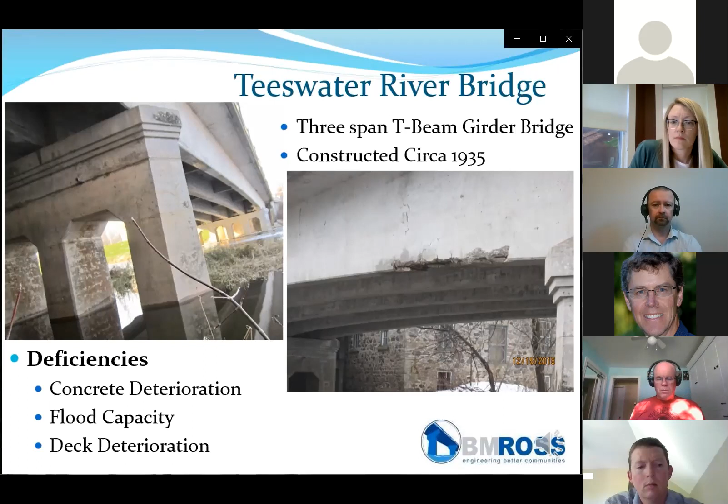The bridge has some special features. At the south end, the abutment is tied into the buildings located adjacent to the bridge, and this will need to be carefully considered during the removal and construction of the new crossing. The bridge is also integral to the flood control dike system at the north end. Solid panels at the north end of the railings are part of the dike system.

These photos illustrate some of the concerns with the current structure. The photo on the left shows deterioration of the concrete on the underside of the sidewalk. It's still safe to use for now, but we need to keep an eye on it with annual inspections, and eventually the sidewalk would need to be closed when the deterioration gets too bad. At right, the photo shows the bridge during a recent flooding event.

You can see how high the water level is on the bridge. Because it's at the junction of the 2 rivers, the water level here is completely dependent on the Saugeen River, and has very little to do with the flow of the Teeswater River under the bridge. We will work closely with the Saugeen Valley Conservation Authority when we determine what span and elevation will be used in the new design.

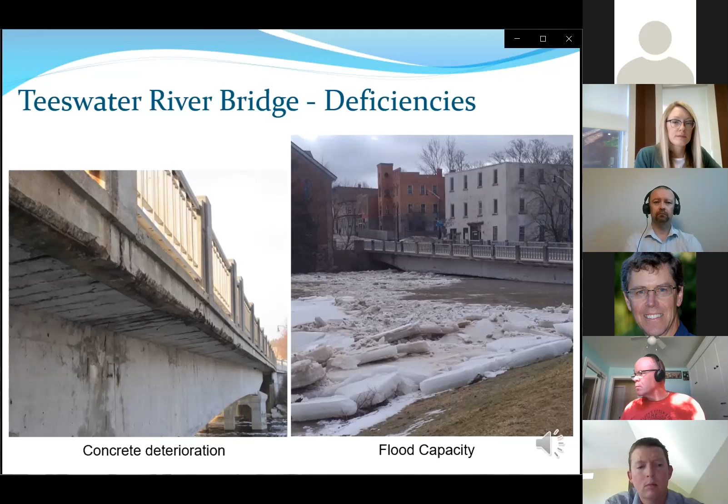The Municipal Class Environmental Assessment process is a planning process used by municipalities when undertaking projects such as road and bridge construction, as well as sewage and water projects.

The process involves a series of steps that are followed in order to evaluate and plan the project appropriately. An evaluation of the environment is conducted to identify specific factors related to the project, including the natural, social, cultural, economic, and built environments.

Input from residents, stakeholders, and agencies are used to assist with identifying the potential impacts, as well as the completion of specialized studies. Potential impacts associated with a project are then identified, as well as appropriate mitigation measures to address those impacts.

This slide illustrates the steps or phases in the Class EA process. The first is the identification of the problem. Why are you doing the project? What is the problem you're trying to resolve?

Then you evaluate the alternatives. Once you identify a problem, a series of alternatives are identified to address that problem. These alternatives are then systematically evaluated to determine what impacts might result from their implementation.

For a more complex project, such as the replacement of the Teeswater River Bridge, detailed design concepts are reviewed of the proposed bridge design. This could include the style of the bridge, the number and width of traffic lanes and sidewalks, the appearance of railings and barriers, as well as other design features.

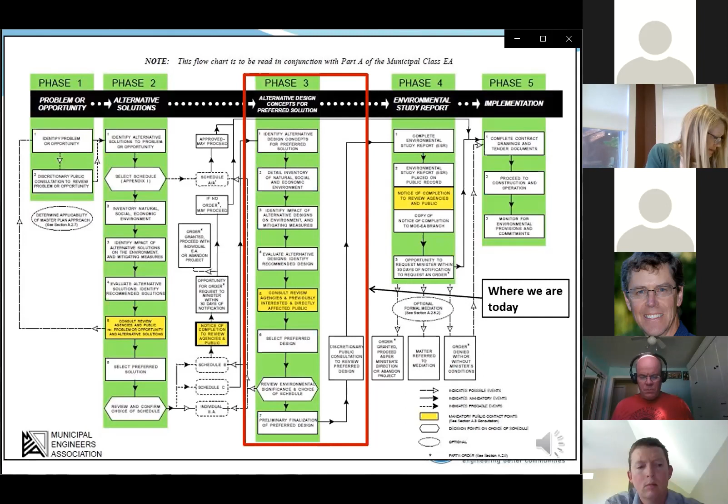The detailed design alternatives that are being recommended in this presentation will also need to be confirmed at County Council before we finalize the EA and move forward with implementation.

This slide reviews some of the timelines associated with the Class EA. The project was initiated in October of 2019 with a notice of study commencement being published in the Owen Sound Sun-Times and the Paisley Advocate. Letters were also sent to various review agencies, adjacent property owners in the community of Paisley, and Aboriginal communities.

Following the initial consultation, in May of 2020, there was a website launched with signs posted at the bridge. This allowed us to capture input from people that don't necessarily live in Paisley, but who use the bridge on a daily basis. That summer, there were 2 specialized studies completed by consultants.

We had a heritage evaluation of the bridge completed by a local consulting firm, and we also had a species at risk assessment completed to determine if there was any special habitat located adjacent to the bridge that would need to be addressed during construction.

That September, we had the first public meeting, which was a virtual public meeting, similar to the format for this meeting. That winter, which is just the past winter, we had the preliminary bridge design work completed and a hydrology assessment was completed for the project.

And now we're in May of 2021 with the second public meeting being held on May 18th.

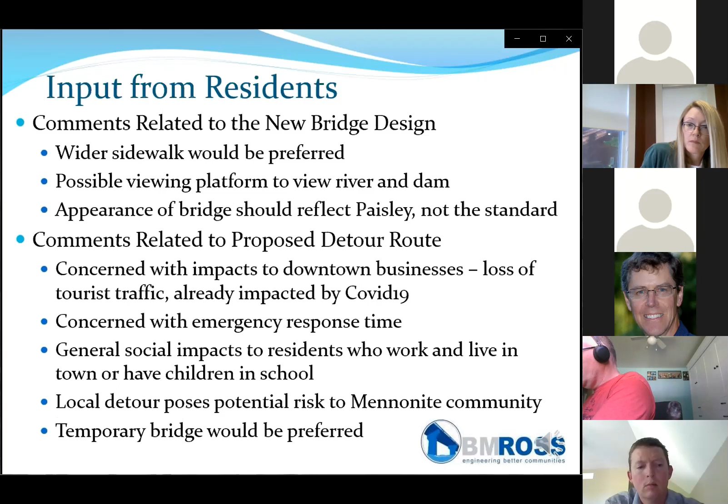As I noted previously, as part of the Class Environmental Assessment, we seek input from various review agencies. For this one, we received input from the Ministry of the Environment, Conservation, and Parks. They confirmed that various consultation efforts needed to be completed as part of the environmental assessment, including consultation with First Nations communities, Métis communities, and various review agencies. We were also advised that the Class EA report completed at the conclusion would need to consider climate change and source water protection as part of our review of impacts.

We also got input from the Saugeen Valley Conservation Authority. They advised us that they have regulations in the area that will be impacted by the project, and that a permit will be required for the new bridge, as well as any temporary bridges or other works that occur adjacent to the river. They also advised us there are concerns related to flooding, and that they own the flood control dike located along the banks of the river, and they will have significant input on any changes to those features resulting from the new bridge construction.

The Ministry of Heritage, Sport, Tourism, and Culture Industries also advised that they have concerns related to archaeological features and built and cultural heritage, and that we will have to submit information to them as part of the project.

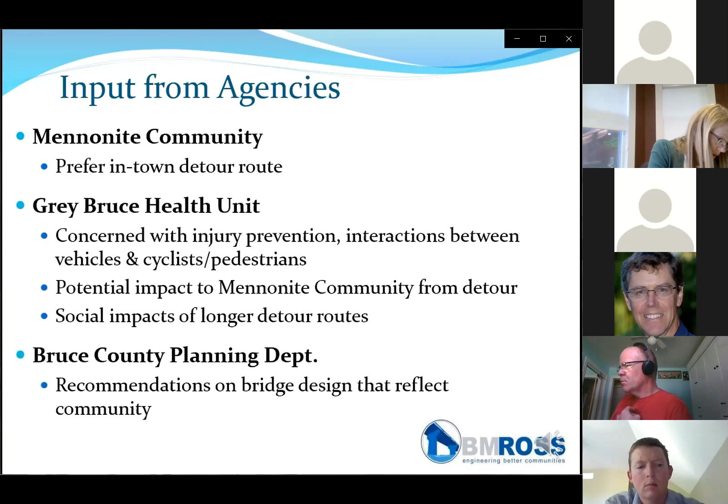The Bruce County Planning Department indicated that the design of the new bridge should reflect the unique heritage and community of Paisley.

I'll talk now a little bit about the hydrology investigation we've done for the site. Hydrology is the study of flow through the bridges and in the area of the bridges. Last time, back in September, we talked a bit about the history of flooding in the area, and we've reviewed the historic flooding events, the 1977 flood, and the flood control study in 1979, which eventually led to the construction of the dikes.

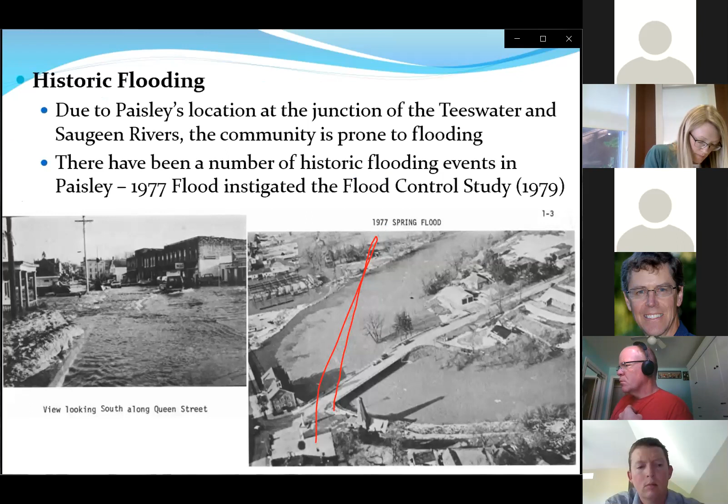Previous flood control studies have been done, and we built upon that. We have to make sure the new bridge, just like the existing bridge, ties into the dike system. You can see how the existing bridge railings have been modified, with a shorter top panel so they could fill in solid concrete walls to prevent a flood event from flowing over the sidewalk and down Queen Street towards the north.

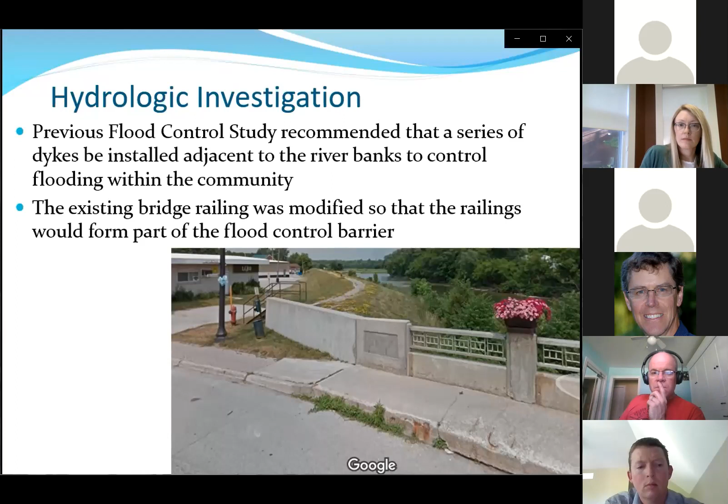The hydrology investigation we did was built upon a model already existing from the 1979 study, which was last updated by Saugeen Conservation in 1990. We then did additional field survey, topographic survey above and below the water, to add to the existing model and show the existing site conditions with that extra information. We used software called HEC-RAS, and we modeled the situation as it exists and with the proposed bridge designs, including the temporary detour bridge.

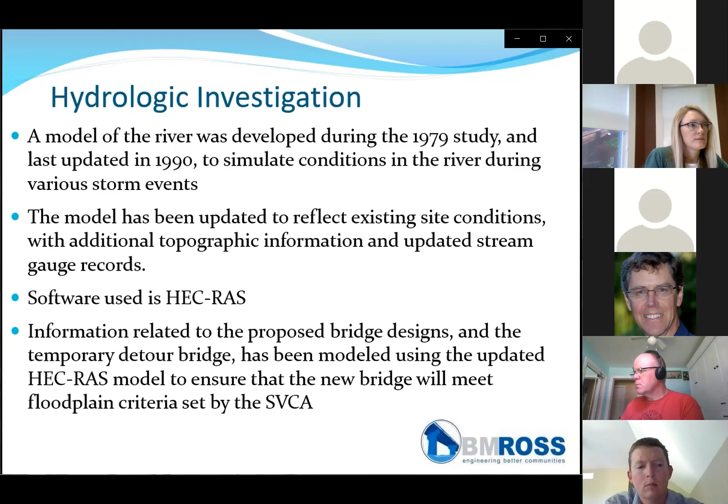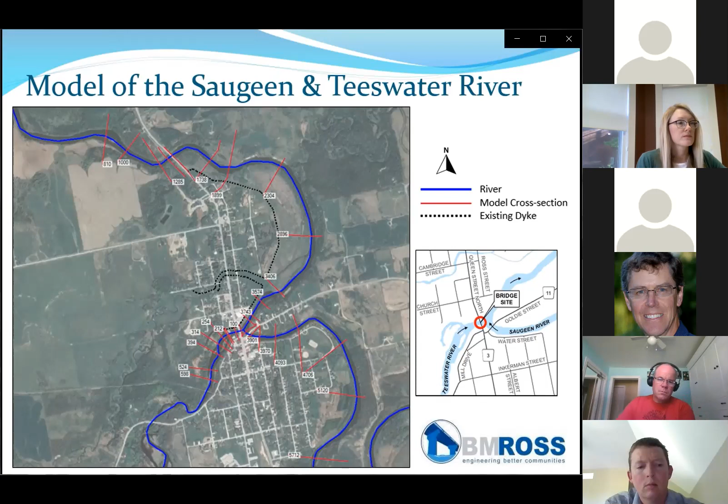So this map shows some of the areas that we modeled. The little red lines that you see are cross sections that we entered into the model, and we especially looked around the location of the existing bridge, and we did a cross section where the temporary bridge is going to be located. Then the model was run using different scenarios with proposed bridges in those locations.

An interesting thing at this site is that the south span of the existing bridge is shadowed by the mill building upstream of it. So that whole span seemed to only carry the flow that was coming through the mill race, and we have to respect the mill race. The future owners and the current owner may want to use that at some time. So we wondered if a two-span bridge would actually meet the hydraulic requirements.

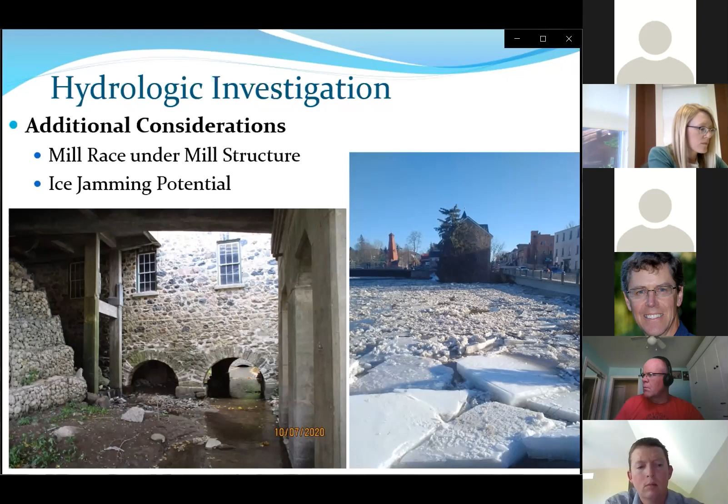So when we ran the models, putting in the proposed permanent bridge into the model, we found that the water levels weren't increased by a reduced span in the bridge. That's because the highest flood levels are actually created by the water in the Saugeen River and not the Teeswater. So it doesn't matter how large a bridge we put in here, it won't affect the water level.

In fact, the proposed structure will improve the flood flow because we were able to use a thinner deck. In other words, the bottom of the beams of the new bridge are going to be higher than the bottom of the beams of the old bridge.

The historic mill race is going to be maintained, and we could handle that flow with a culvert in behind the abutment of a new bridge.

Rock protection, erosion protection, has to be provided to prevent scour due to higher flow velocities, which actually happen at lower flow levels. The bridge railings are going to have to be solid panels in some areas, or up to a certain level, in order to give us that flood protection so that the bridge isn't a weak point in the dike system.

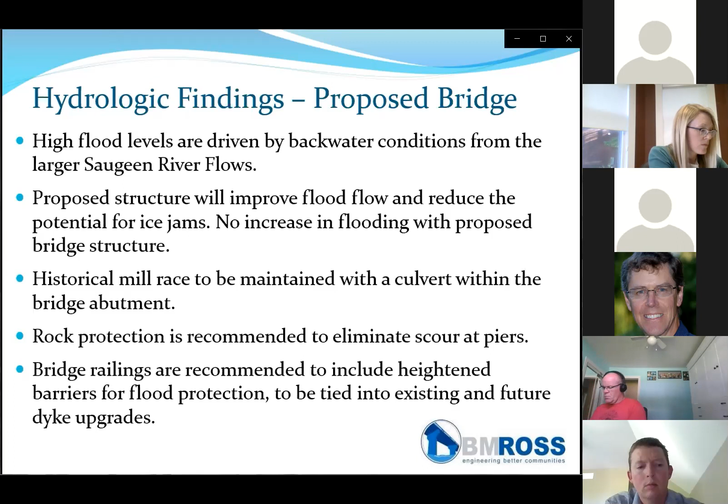The detour bridge was also modeled. We had to figure out what is a safe span and a safe elevation for the bridge. In this case, we're only designing to the 1 in 50 year flow, because the detour bridge is only going to be in place for about 1 year, the probability of it getting the 1 in 100 year flow is not practical. So we design it for a lower standard just because of the probability.

So the low steel elevation has been designed to clear the 1 in 50 year flow. We won't have to reduce or puncture the dike elevation. The road level of the temporary road will be about the same level as the dike.

There will be some temporary fill put into the floodplain at the south end, just to support the abutments of the temporary bridge, but that will be removed in the end, and the amount of flood storage that will take out is negligible. Again, we're going to need some rock protection to make sure that the abutments of the bridge are not scoured out.

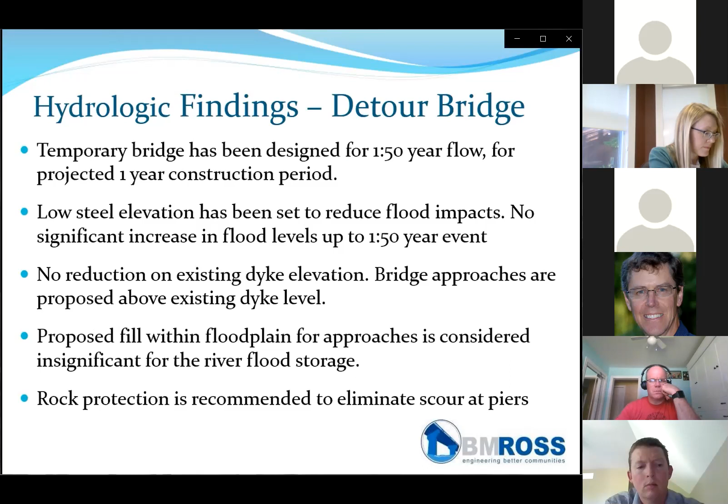So the next few slides will review the Class EA detour alternatives that were considered. These were reviewed briefly in the last public meeting, but we've done additional investigations since then that go into a bit more detail. There were 3 detour alternatives identified as part of this project.

Detour alternative 1 was a detour using strictly county roads, which were all paved, but that route was quite long. Alternatives 2A and 2B were detours using local roads. We had an east and a west option. The east option was in Arran-Elderslie, a little bit shorter, and the west option was in both Brockton and Kincardine, heading to the west out of town.

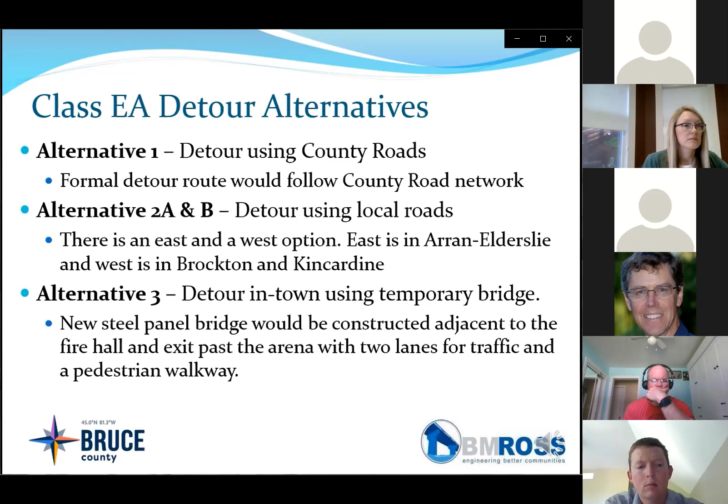Alternative 3 was the in-town detour using a temporary bridge, which would be constructed just for this project and then dismantled following completion of the new bridge. It would be a new steel panel bridge constructed adjacent to the fire hall, just downstream of the existing bridge, and would exit past the arena, with 2 lanes for traffic and a pedestrian walkway along one side.

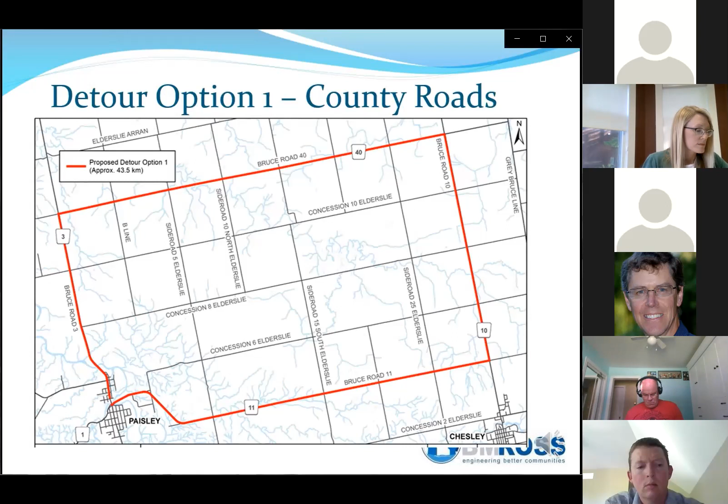Initially, we had identified this route as a truck bypass, and it probably would be used primarily by trucks, just because due to the length it would be unlikely that a lot of local residents would use this route. And it would result in impacts to local businesses by having local traffic detoured away from the community.

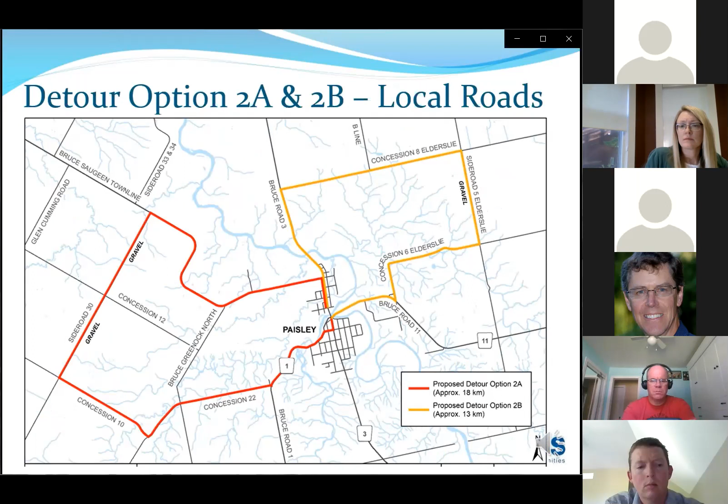In order to make this a viable route, we would have to improve the road condition to make it safe enough and practical for trucks. Something raised at our last meeting, a lot of people raised concern about Side Road 5 because it went past a school. So we considered we would have to pave the road because of the volume of traffic going up County Road 3. And we put in an extra paved lane dedicated for bicycles and horse-drawn vehicles.

So that adds a fair bit of cost. Many of the other roads, even the ones that are paved, the pavement wasn't sufficient for the truck traffic volume that was going to be happening, so they would have to be improved with new pavement. We also looked at the intersections. Because a large number of trucks would be turning here, we looked at the truck turning radii, and in some cases we were going to have to widen the road at these intersections.

All of these costs added up, and we got close to a budget of $2 million for improving this detour.

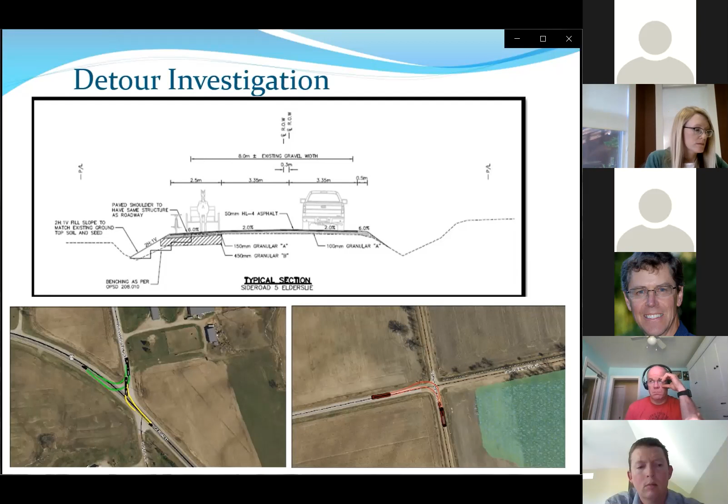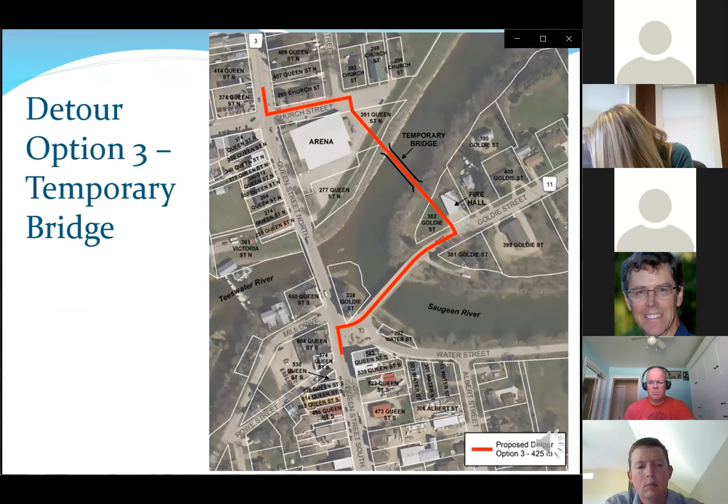It has been used successfully in some other urban settings. There will be some truck noise and exhaust fumes at the intersections with Church Street and Goldie Street. Pedestrians may feel some uncomfortable vibrations when they're on the sidewalk and a truck passes over the bridge. But again, this is considered tolerable for the 1-year construction period.

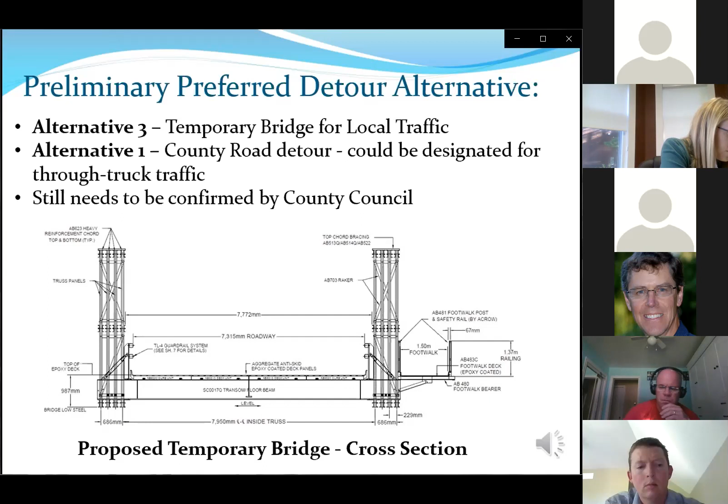This design and concept still needs to be confirmed by County Council as an acceptable option for them. The total cost of the in-town detour is closer to $2.5 million.

So the next few slides talk about the detailed design alternatives associated with the design of the new bridge. We're going to provide several railing options that are being considered, options that provide a sympathetic image of the previous bridge and also address concerns residents presented about having better viewing opportunities from the new bridge to view the surrounding area.

We're also going to look at some sidewalk options. A standard sidewalk width for a new bridge is typically about 1.5 meters or 5 feet. But we're proposing wider sidewalks on each side at 1.8 meters, 6 feet, and also wider viewing areas at the center of each bridge so residents and tourists can view the river both up and downstream of the bridge.

We're also going to go through some different design details associated with the new bridge, including a 2-span option as well as a 3-span option.

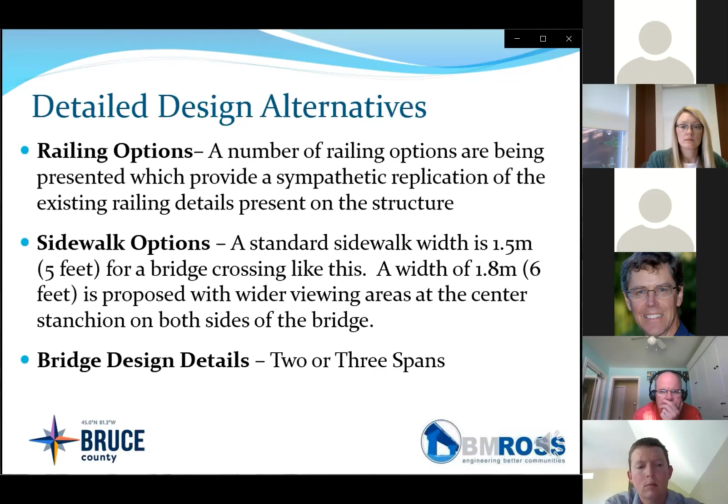So first, let's take a look at the existing railings. This is a steel panel railing design, and it was popular from the 1930s to the 1960s. It provided for fairly good visibility when you were looking at right angles to the railing. The pickets, though, when you're looking at an acute angle, they don't allow very much visibility at that sharp an angle. Here you can see how the panels have been modified for the flood control, where there are now concrete parapets in the lower section.

So there are a number of issues with this type of railing. It is definitely too weak structurally for the modern bridge code. We have to design for impact loads from vehicles that might accidentally jump the curb and hit the railing. We need to make sure that the vehicles are contained within the bridge.

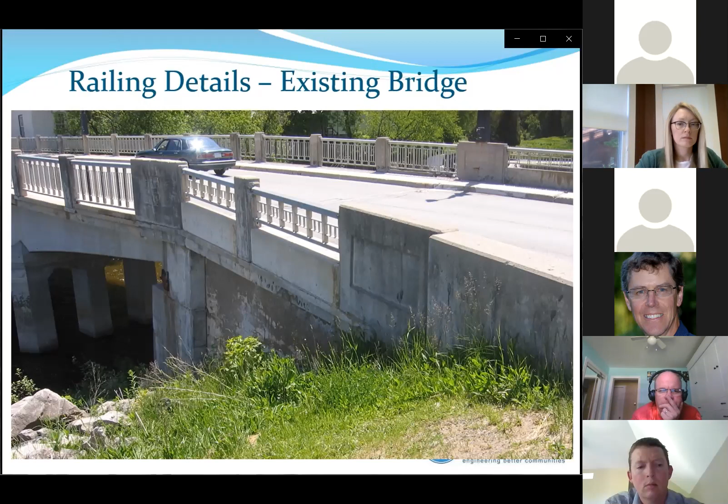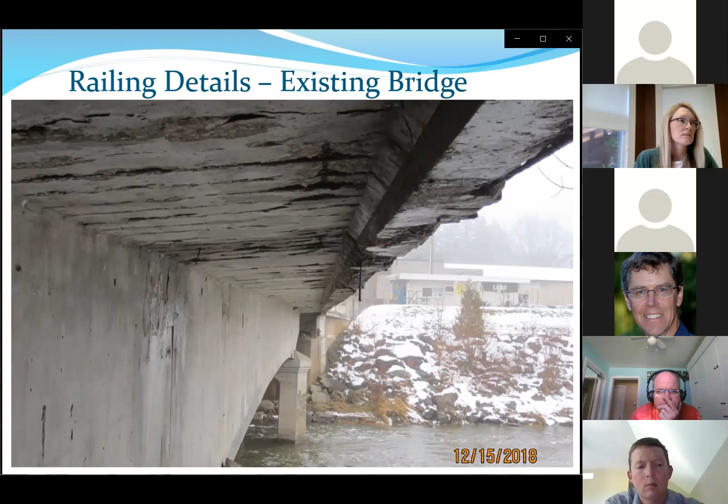It also allows for salty water or slush in the wintertime to dribble over the edges and cause some damage underneath. And that's shown on the underside here. A lot of people won't see this, but there's a lot of corrosion happening with the reinforcing steel on the underside of the sidewalk. It's safe for now, but it has a limited life. And that salty water will continue down and get at the tender underbelly of the bridge, the structural girders or beams, and it's attacking the reinforcing steel in those structures as well. So for our new bridge, we don't want that to happen.

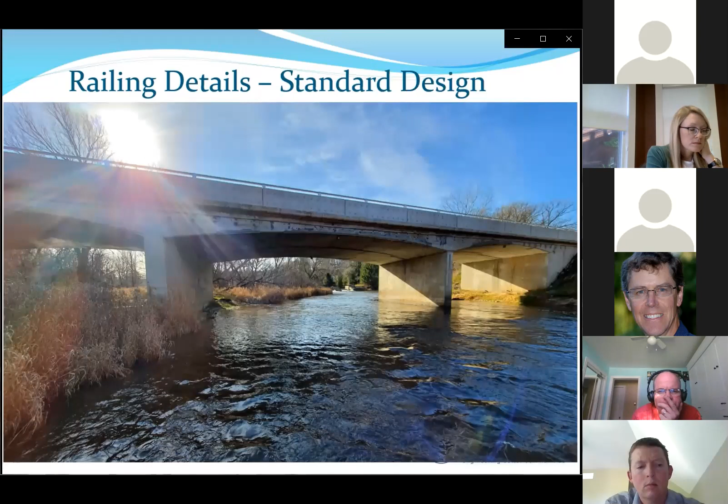So last year, the Starks Bridge got a brand new railing. This is called the standard parapet wall. It's 825 millimeters high and it has a handrail on it. From the inside, this is what it looks like. This is typically used on highway bridges, but this would meet the requirements for strength and for opening size, all the dimension criteria to meet bridge code requirements. But we certainly got the message that a typical railing is not going to do for the Paisley downtown. So we won't be using this as an option.

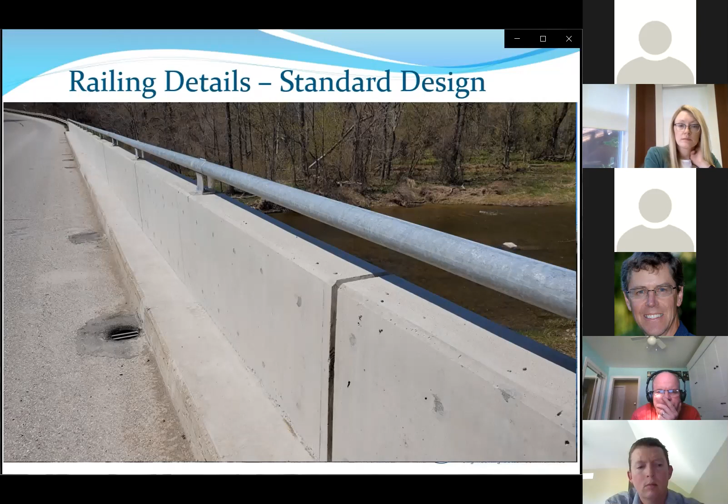In Chesley, they did use the standard parapet wall. We were under the gun for design time because of the emergency replacement of this bridge. In this case, we actually put in just these fairly simple dentils in the formwork to give it an appearance that was sympathetic to the railing that was there before, but it's still the standard parapet wall. And it's got some embellishments at the light posts. You can see a build out that breaks up the plain view of the wall a little bit. You know, we don't want to start a railing war between Chesley and Paisley, but this option would work in Paisley as well.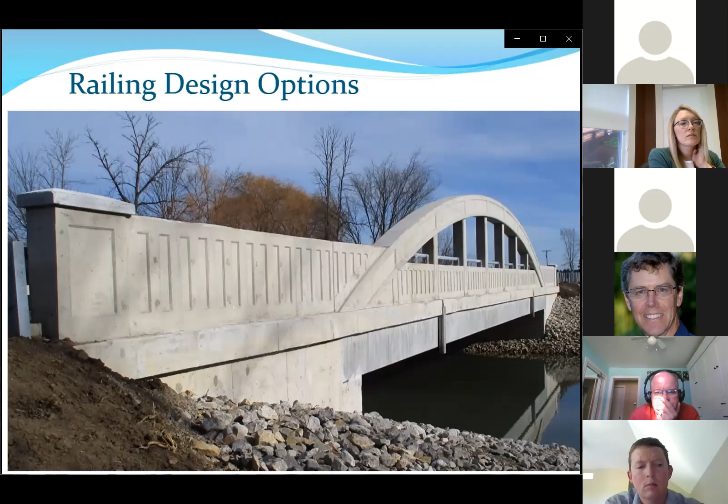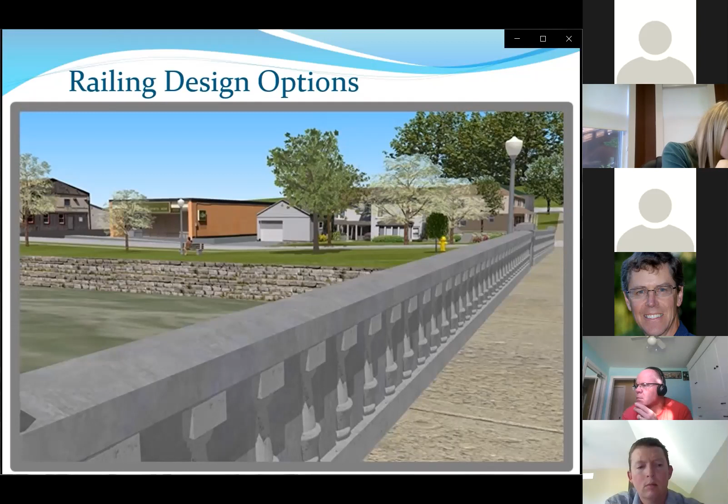In St. Mary's, we designed a custom railing. In this case, it was to look like a historic bridge that had been there one generation before, based on old photographs that we had seen. And we were able to provide a concept sketch like this, and then it was constructed with custom-built formwork, which added to the cost, but this was the preferred alternative for St. Mary's.

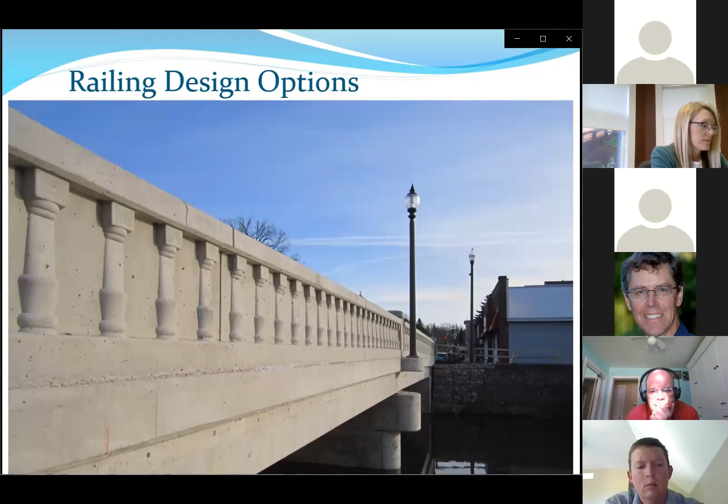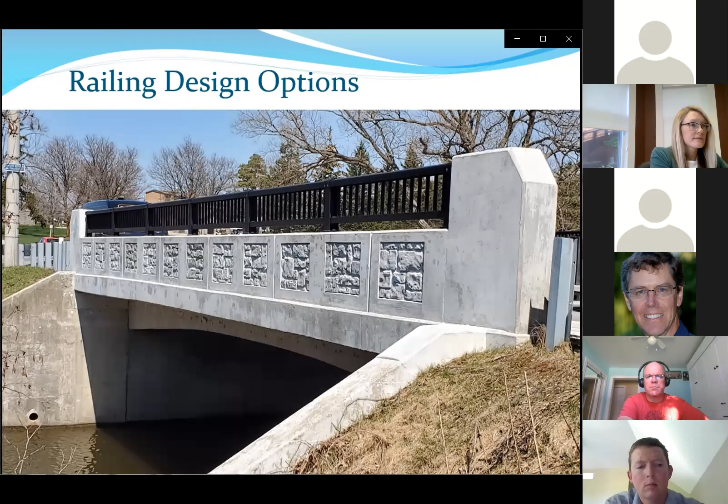BM Ross can't take any credit for this bridge. We saw this example in Stratford, Ontario, and we were interested in it, and this is giving some inspiration to the design that we came up with for the preferred alternative that's preliminary and being presented. So this has a standard parapet wall, and viewed from the inside, you can see the stone embossment that was put into the formwork. Now this is higher than it needs to be, and we're proposing a concrete wall that's lower than this one by a few inches, and decorative metal railing on top of that to allow viewing over top of the parapet wall.

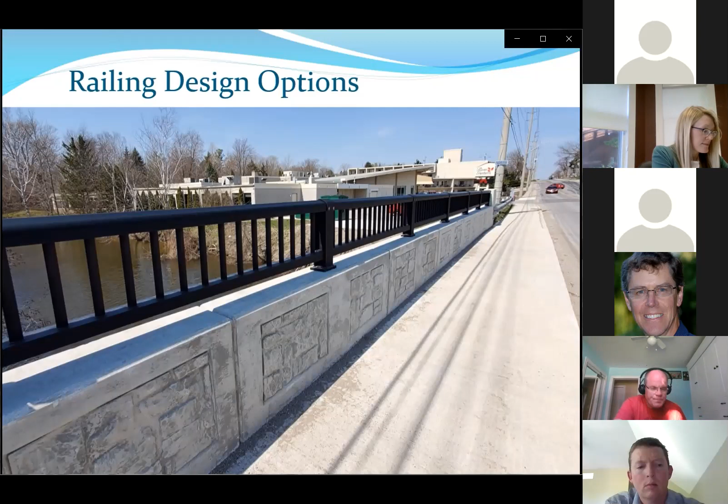Another option that people are interested in, they wonder, is it possible to have a barrier between the traffic and the sidewalk? And yes, it is. This is one example in Exeter. Here you can see the standard parapet wall with some stone imprints in the formwork, which is attractive. And then there's an open railing between the sidewalk and the edge of the bridge.

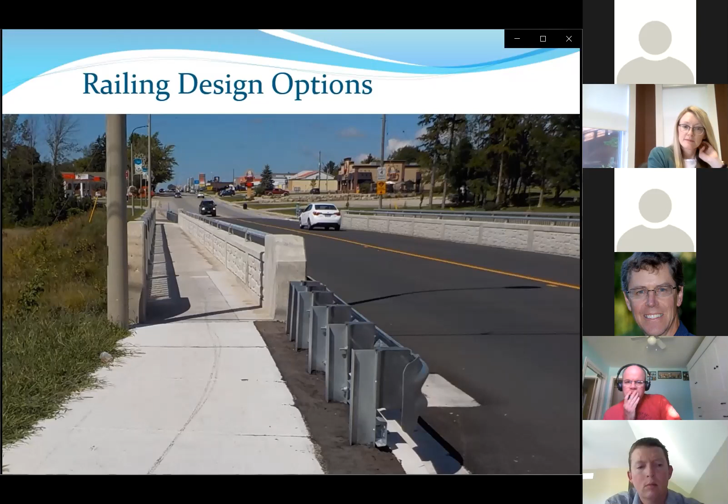There are some problems with this, though. If you take a look, there's still no barrier to prevent the salty slush, the salt water, from dribbling over the edge of the bridge and attacking the underside, because you will be putting salt on the sidewalk. Also, look at the end of the concrete parapet wall. It's closer to traffic now, and there is a danger, or perceived danger at least, that vehicles could possibly hit head on to the end of that concrete wall.

So we're required to put energy absorption material. In this case, there's guide rail there, and it's hard to imagine how you would have guide rail to protect the end of the parapet wall and how that would tie into the rest of the sidewalk in downtown Paisley.

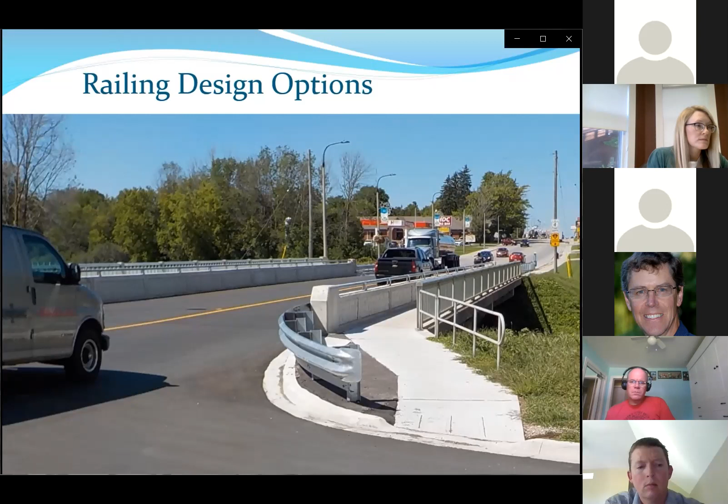Another disadvantage of this system is an optical illusion. With that solid wall right up against the travel lane, drivers of vehicles would swear that we've narrowed the road. There's an instinct to stay away from that wall and be closer to the center of the road, and that gives the impression that the road is narrower than what it really is.

Taking a look at the existing bridge deck, 8.53 meters from curb to curb, we're proposing almost the same width. It's only going to be about 3 inches wider from curb to curb. The difference is in the sidewalk. Where it was a 5-foot wide sidewalk, we're proposing a 6-foot wide sidewalk. A lot of municipalities prefer the wider sidewalk for their snow clearing equipment. It's also making it easier for mobility scooters, things like that.

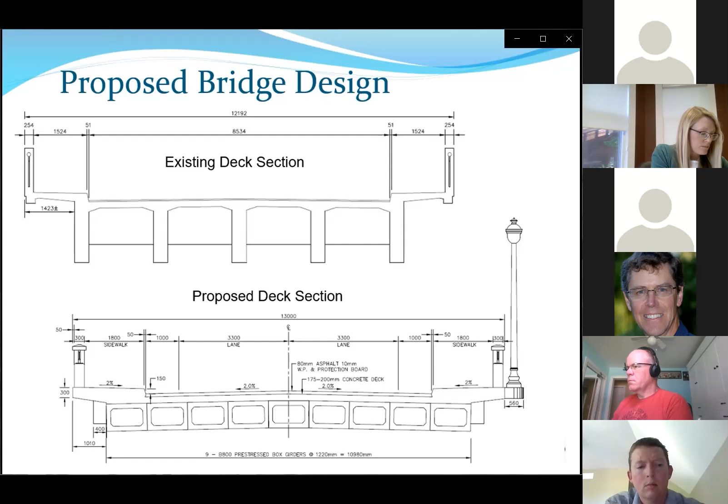Taking a look at the structure underneath the deck, you'll see that it's a thinner deck section, or thinner beams. These would be pre-stressed concrete girders, box girders, and they're a lot shallower than the existing T-beam stems that are there now. That should give us more clearance for the water level, but it's still not going to get us totally above those flood levels. At some times, you will still see the bottom of the girders submerged underwater.

We took a look at a few options. The top option is just straight rectangular. This is very much the way that the existing bridge looks if you were to look straight down on it. The only difference is that the sidewalks are about 1 foot wider. And then in the lower view, we thought, what if we have some expanded viewing areas, some viewing platforms? Because in the comments that we received from the public previously, they indicated how important the view from this bridge was.

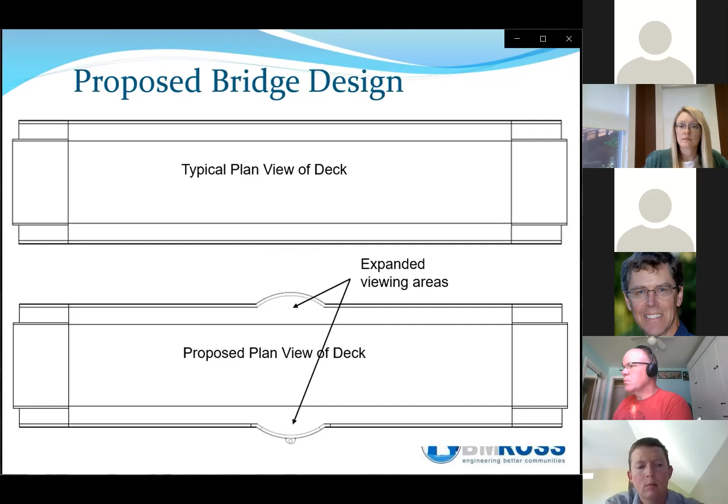We looked at two different options for the bridge arrangement, a 2-span option and a 3-span option. The existing bridge, remember, is 3 spans. The 2-span option, again, we were going on the assumption that we didn't need the southern span for hydrology. Remember, it's in the flow shadow of the mill building and doesn't really contribute to the amount of flow that goes through this bridge except for the mill race. So in this option, we're showing a rectangular box culvert that lines up with the arches from the mill race, and that would handle all of the flow from the mill race.

You can see in the view the old location of the pier, and it's in the deepest part of the channel, which is not really the best for flow or for canoe traffic. So we've split the river into 2 equal spans with a pier located further to the south. We've improved some of the hydrology by moving the north abutment a few meters further north and putting a sloped embankment in front of it. In this view, we even show a 1.5 meter, 5-foot wide flat part up against the abutment that could be used as a walkway if fishermen or canoeists are walking underneath the bridge.

The 3-span option: if the hydrology didn't work out for us, we were going to go back to the 3-span option, assuming that that southern span would allow for enough water flow under that span to get back to the flow conditions we needed for the bridge.

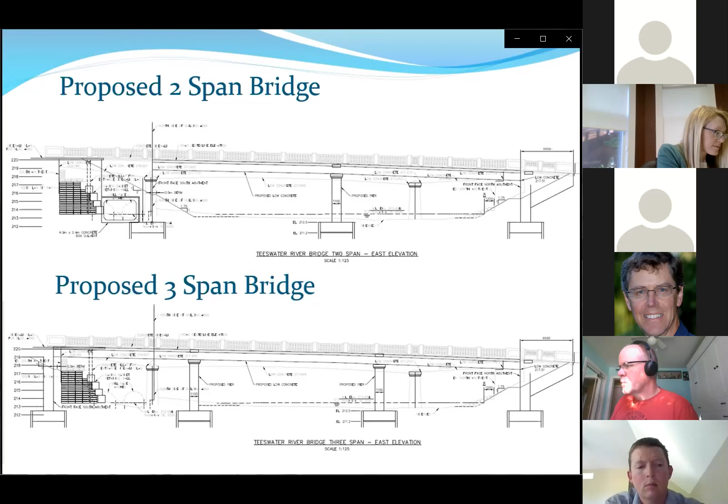The pier that is there now is 5 columns and 4 openings, and it looks quite unique. It's an attractive pier, and unlike most places, the pier in Paisley would be seen by a lot of people, either anglers or canoeists going down either of the rivers. So we were trying to put something that was sympathetic to that.

Now, this is a little bit false. We're just showing imprints for those 4 openings. They really aren't openings right through the pier as they are now. And in this elevation view, we've shown a proposed railing that is a short parapet wall that's really only 2 foot 5 inches tall, and then an ornamental steel railing on top of that. There are a few solid concrete end posts to give some relief to the plain nature of it.

We also considered plain imprint panels rather than the embossed stonework. The embossed stonework is attractive, but you have to remember right beside this bridge is real stonework in the foundation of the old town hall and of the mill. And it might seem a little fake to have embossed stone print right beside actual stonework. So we stayed away from that.

Also, the plain panels, if we're the artistic village of Paisley and you want to do some murals as you have in the past, it would be a more even palette for any artists that are going to do work on those railing panels.

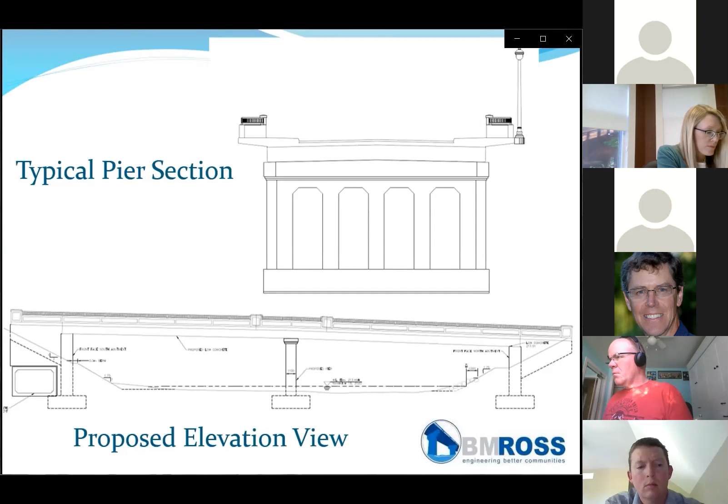So this is how the proposed bridge would look in its environment with the buildings around it. Now, this is very much the same location as the existing bridge is, but it's shifted a little bit further to the north. Again, there isn't a span in the line of the mill building, and the pier has been shifted to the south.

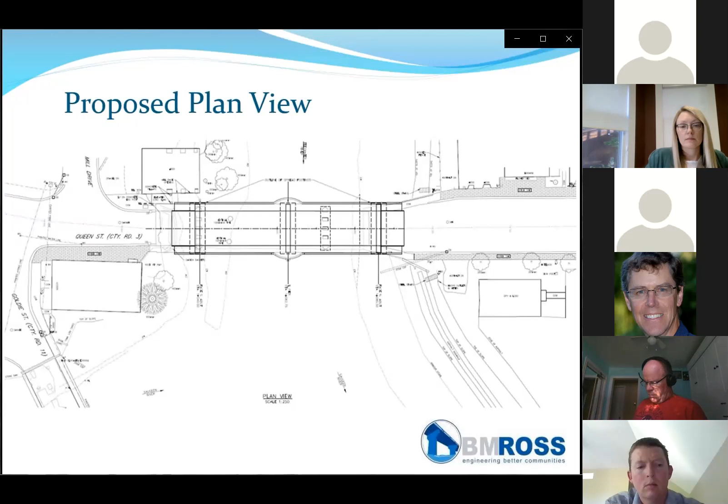So the design recommendations are that the proposed bridge deck have 2 lanes very similar to the existing, with 2 viewing platforms on either side on the wider sidewalk. We're recommending the 2-span bridge because after doing the hydrology investigation, the 2-span bridge did give us the required flow underneath, and that includes a culvert at the south end to accommodate the mill race.

The sidewalks are going to be increased to 1.8 meters, basically 1 foot wider than existing, and then the viewing platforms would be another 4 feet wide in addition to that. The railing would be solid concrete railing, but only to a height of about 700 millimeters, which is 2 foot 5 inches, and a metal railing above that would be easier to see through. This would be similar to that example we showed from Stratford.

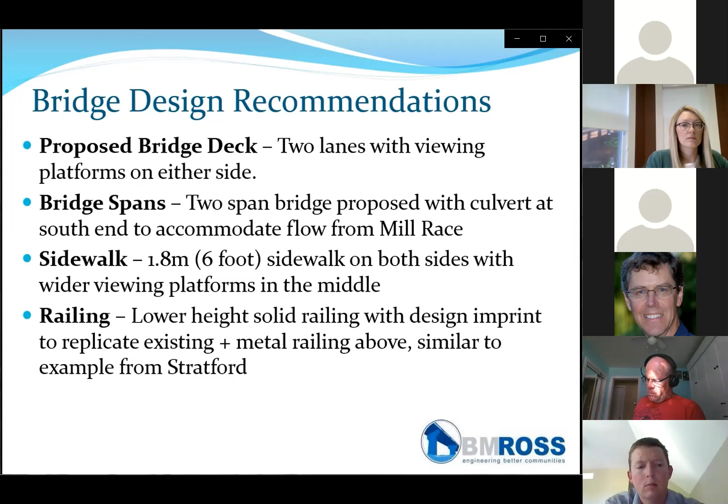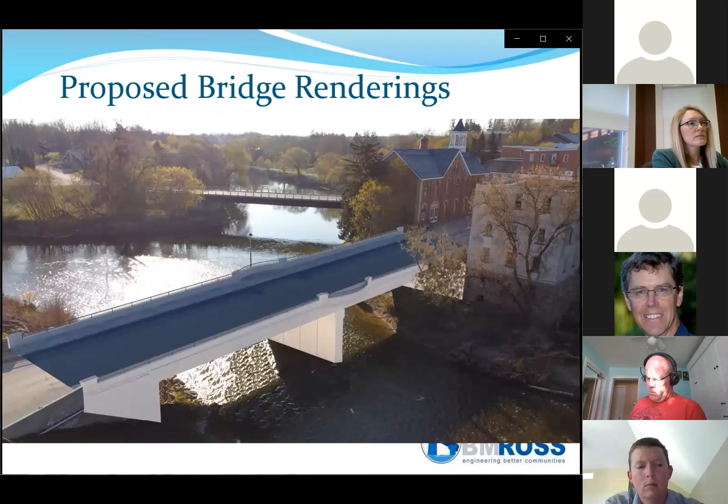So let's take a look at some renderings that we did with some photographs of the existing bridge, and we'll overlay the preferred alternative that we're proposing at this time. This is the view looking north. And this shows that widened viewing platform.

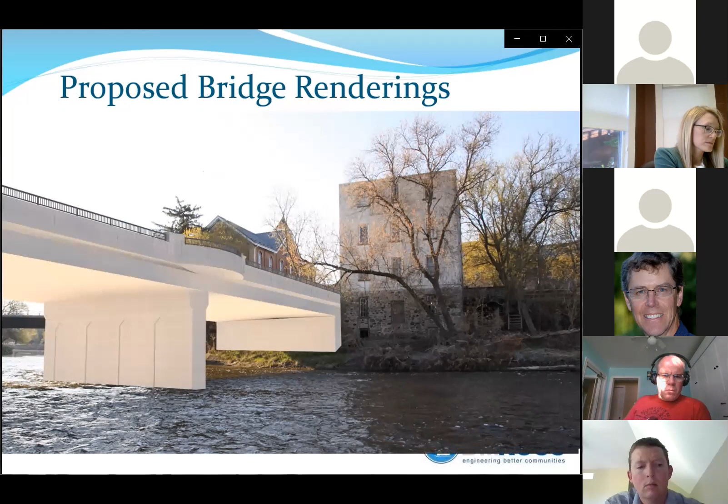This is the view that anglers or fishermen would see from down at the river's edge. Notice that we don't have openings right through the pier. We've just imprinted some fake openings, I suppose, to give it some shadow relief and a little bit more interest. It's not expensive.